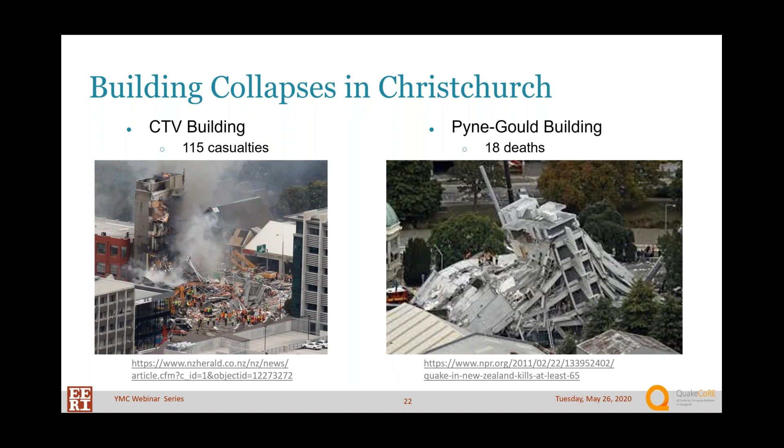Another thing that came out of this earthquake is that there were some widespread access restrictions due to safety cordons around buildings that were pretty heavily damaged. I was really glad to be able to be there in person and get to know a little bit more about how this all works, because this is actually what inspired my PhD research. And so to actually be there in person just changed how I viewed all of that. So it was really great.

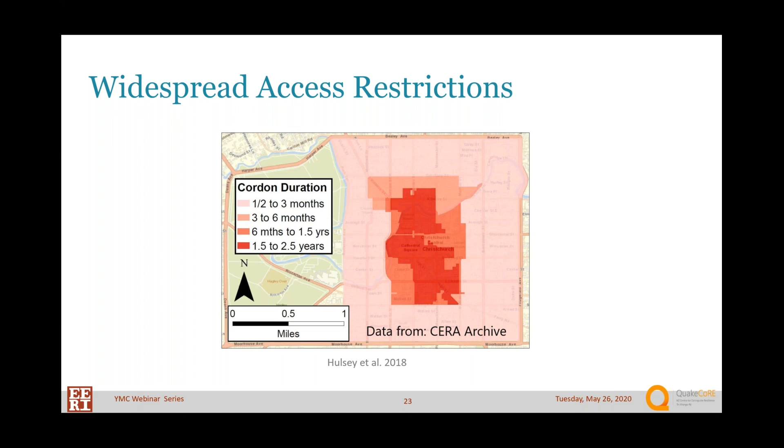So that was one of the earthquakes that we were there to observe how the recovery went. But the other one, as Caroline mentioned, was the Kaikoura earthquake in 2016. This is a figure from Thornton Tomasetti. You can't see all the little writing there, so what I'm going to do is show a few of those annotations a little bit larger and show how our trip that Caroline just outlined actually perfectly aligned with these. So it was very intentional that we hit all of these.

So one is that there was a lot of building damage in Kaikoura. We got to actually stop there. That was the scene that the beach picture was from, Kaikoura. But on the way there, we got to go to the leader farm and see all of those ground displacements and the landslide that Caroline showed a picture of.

And I think this was really, really moving for a lot of us because we got to meet the wife of the husband and wife team who run the Leader farm, and just the way in which she spoke about their experience. The landslide actually covered their power plant and their water supply, and just the way in which she discussed how they bounced back from that. I think that was probably the biggest thing that I took away from what resilience means.

And many of us were joking about how we would want to come back and be an intern at their farm. I'm not sure that it was all entirely joking for everyone. That was really, really fun.

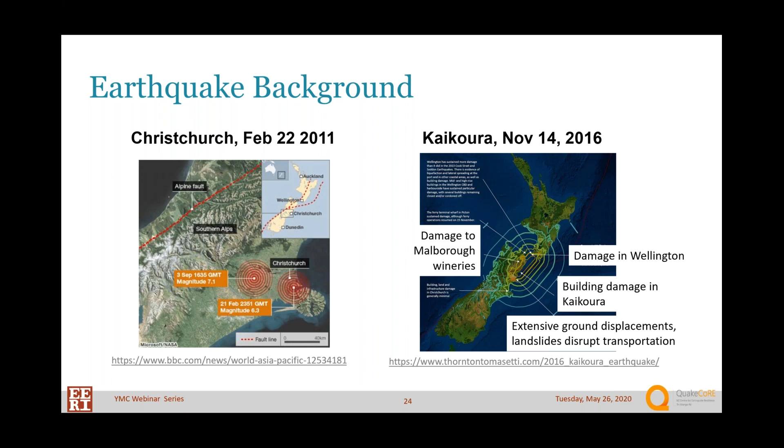So one of the big things that came out of that earthquake was lifeline damage in and out of Kaikoura. So all of the highways going down the north eastern edge of the South Island were completely closed off. You can see that in the right figure here. And so Kaikoura actually was inaccessible by road for up to 6 months. And then I think the southern direction got opened first, and then another 6 months later, the northern direction was opened.

So it really, really affected that town, but also all of New Zealand's transportation system, and making sure we could get goods and things across. So it was really, really impactful.

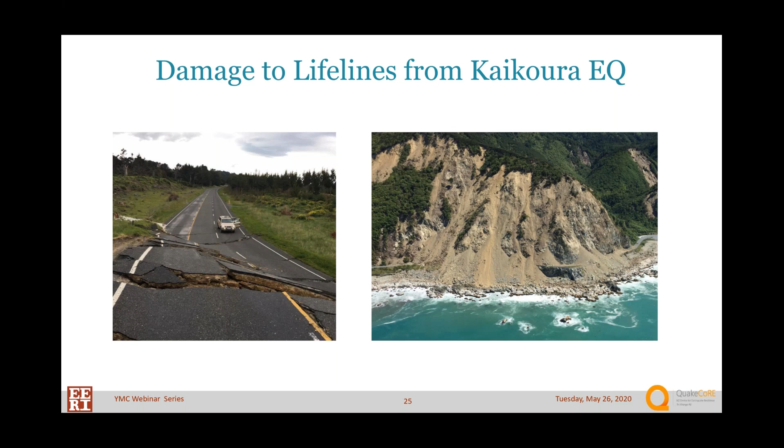And so as I talk now about the recovery, I want to frame it based on something that was discussed in the National Civil Defence Emergency Management Strategy, which is where they're talking about what it means to have recovery. And the 3 R's that they talked about in this space were risk reduction, readiness, and response. So our conversation currently about the built environment is going to focus mostly on risk reduction, but also the way in which you structure the built environment can contribute to readiness, which is making sure that in the event of an earthquake, you are ready and prepared to act as necessary.

And then the response would be making sure that you're able to really enact and move forward with all of those efforts. But we're going to focus primarily on risk reduction. And the 2 opportunities that we observed in this were, 1, to rebuild with enhanced structures, and 2nd, to reconfigure the built environment. So with regards to rebuilding with enhanced structures, one of the things that came out of this is that there were updated hazard maps.

As Caroline mentioned, it wasn't even known that there was that fault that showed up on the Leader farm. So there's a lot more information that came out both after the Canterbury earthquake sequence and then even during Kaikoura about what the hazard really was. And so one of the things was that the earthquake hazard maps were distinctly changed from before and after the Canterbury earthquake sequence. That's the one that was going on around Christchurch back in 2011.

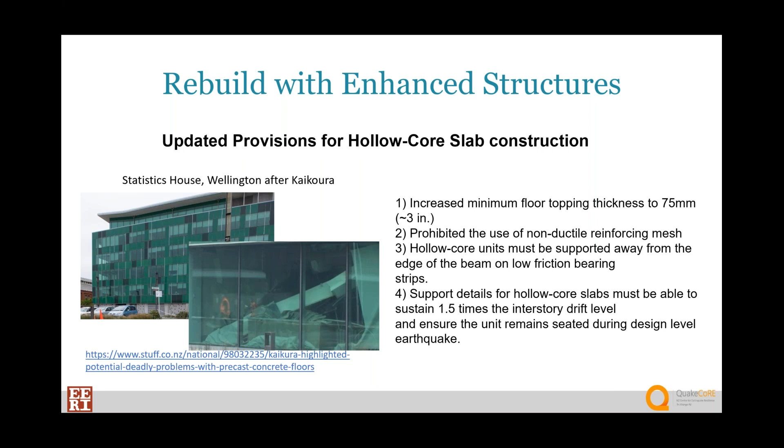Another thing is to start implementing low damage technologies. So this is a picture of the Rehua building on the University of Canterbury campus. This, instead of being torn down, was retrofit, and the way in which they did that was to use viscous dampers and buckling restrained braces. So here you can see one of the viscous dampers, and then here you can see a buckling restrained brace.

And it's been interesting to see how in the aftermath of the earthquake, New Zealand was really ready to start embracing these new technologies. There's been speculation that in the States, if this were to happen, it would be a little bit more difficult to embrace innovation quite as easily, just because of the way that our codes work and things like that. But it was cool to hear how this was addressed in New Zealand.

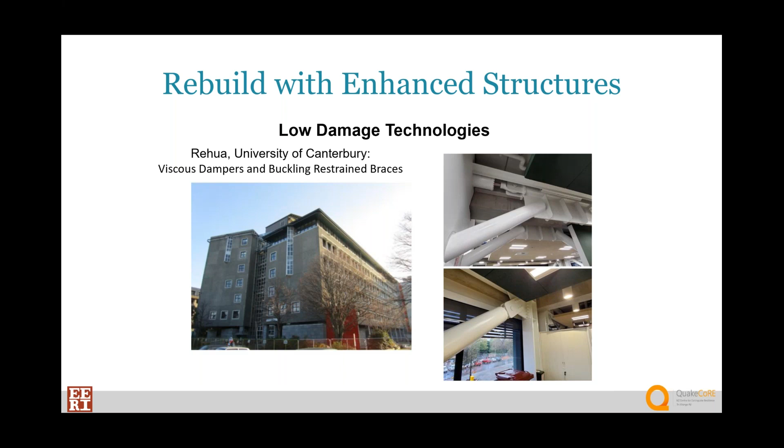Another thing is that a lot of people started using base isolation. So here on the waterfront in Wellington is an example of that. I put in these red lines here so you could see what we're talking about, but this is basically right around here on the left picture, down on the ground. And it's an isolation gap that you really wouldn't see if you didn't know to be looking for it. But in the event of an earthquake, it allows the building to slide with respect to the rest of the ground, and these pavers would actually pop up and move so that the building could move with respect to the other part of the ground.

On a personal note, this walkway was an interesting one for me to remember, because this is where I first started talking to Ken Elwood, who was there from University of Auckland, to give us this tour. And that conversation has since led to, I will be doing a postdoc with him after I finish. And so that's just a plug to say these are really, really important. These EERI events, including travel study programs, are really important ways for us as younger members to really get involved. Even if you can't go on a travel study tour, it's great to go in person to the annual meetings. I went in 2015, the first one that I ever attended.

I didn't know a single person. I didn't go with anyone from my university, but the way in which I was welcomed, even though I didn't have anything to offer, I didn't have a poster, it was really quite incredible. I still talk with some of the people who I met there. They're well known in our field. I also joined the public policy committee at that time. It was an open committee, and because I've continued to stay with them, I was invited to be part of the planning committee for the policy track at last year's annual meeting in March. So given that this is a younger members committee discussion, I wanted to put in that plug and say it really is a great way to engage with our organization, and EERI and members of EERI are wonderful at bringing in and welcoming younger members. Back to the presentation.

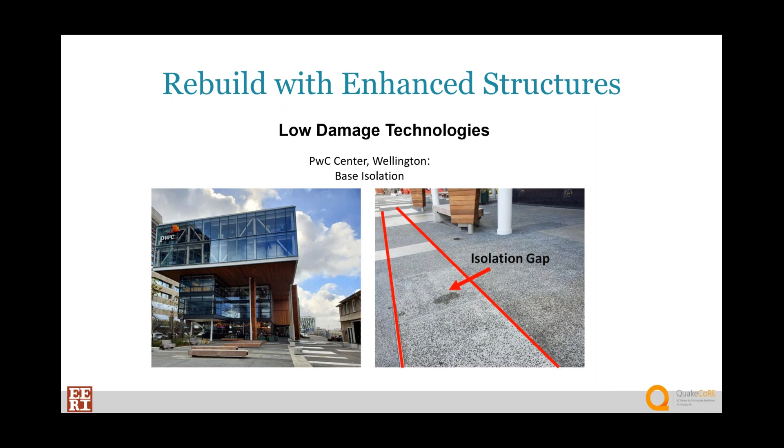Another thing, in addition to all the buildings, there's an opportunity to rebuild with enhanced infrastructure. So I mentioned all of the lifelines, those roads are what I showed you, but also there were issues with power and cell service and things like that. And so that was a big effort for how they would address and rebuild those roads. But one thing that they recognized was that you can't necessarily prevent any damage in subsequent earthquakes. And so they wanted to incorporate a design that would allow for quick recovery of road networks if, in fact, there was damage to them. So try to make them less damageable, but also in the event of damage, how can we get them back on board more quickly?

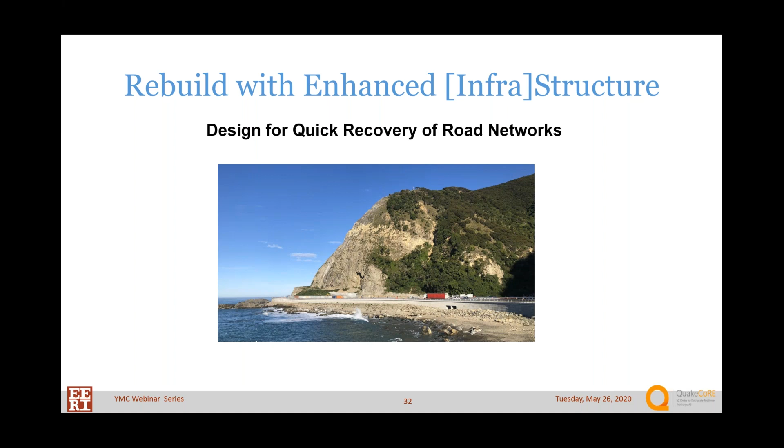So we've talked now about the opportunity to rebuild with enhanced structures, ones that won't be damaged as easily, but there's also, in the aftermath of the earthquakes, when there really was a significant amount of destruction, and so then as you're rebuilding, you have to figure out what is it that we're going to rebuild. And so there's this opportunity to also reconfigure the built environment. And so we thought a lot about what opportunities are there in that space in order to reduce risk.

But really the benefit of this is that all of these groups are already working now before an earthquake that will come in the future. And so they know how to work with each other. They know what each other's needs are. They know who to talk to and who's the best person to ask for various things. And so that's been really cool to see how by reconfiguring the built environment, bringing everyone into the same building, they're really enabling their readiness, which was another one of the R's of recovery, making sure that we are ready to respond to an earthquake.

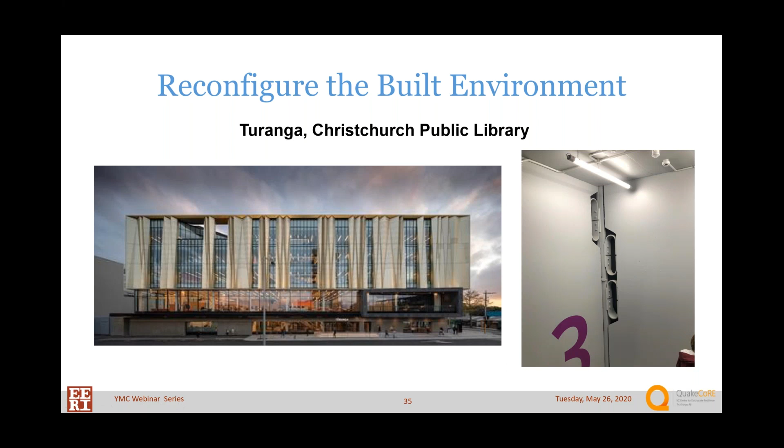But again, this needed to be done with enhanced structures. And so what they did here was that they have shear walls. On the right picture here, we see a shear wall on the left and on the right. And then they let these rock with respect to each other so that when you get a lot of movement in the earthquake, there aren't rigid connections that are going to break. Instead, there are these U-shaped fuses, which are going to accumulate all of the damage. And then because they're open and readily accessible, those can be replaced after an earthquake.

So again, what I've discussed is the opportunity to rebuild with enhanced structures and to reconfigure the built environment. And both of those are ways to handle the risk reduction portion of preparing for and anticipating recovery. But as I also said, it really gets us ready for the readiness aspect that will be coming, making sure that we're thinking about and addressing and working together so that all of those aspects of recovery can move forward the next time this comes around.

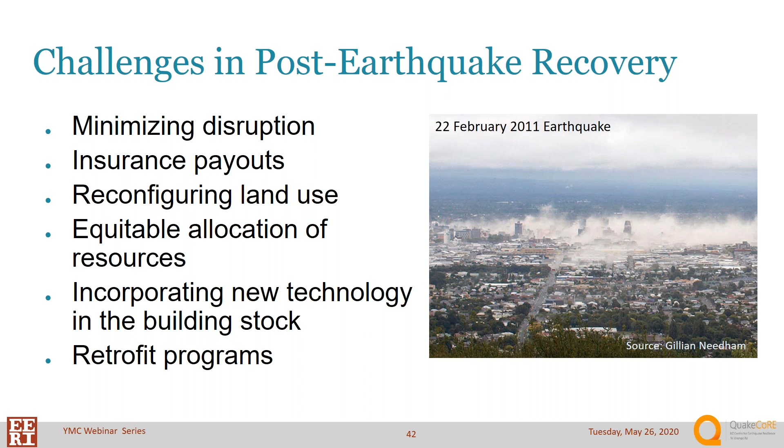So the first thing I want to come back to is the red zone land that Anne talked about. These were areas mostly around the Avon River that were subject to liquefaction or lateral spreading. And this was quite a problem in Christchurch. There were about 8,000 residences that were in the red zone.

So as you recover as a community, you've lost 8,000 units of housing in a city of only about 400,000 people. That's actually quite significant. And this is land that it's essentially been deemed uneconomical to build on again. So that's a permanent loss of space that you would be able to build more housing on.

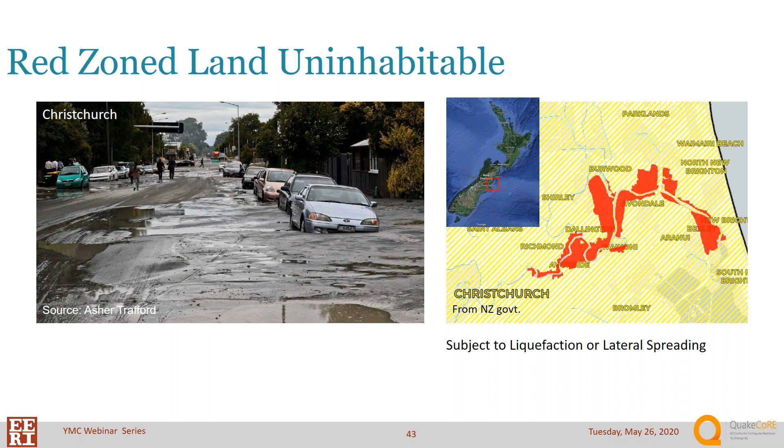Another area related to being able to use space again and minimize disruption is related to cordons. Now, cordons have a lot of benefits, and Anne touched on this as well, that you weren't able to access parts of the city center for quite a long time after the February 2011 earthquake. So there are certainly short-term benefits of cordons.

There's easier unimpeded access for first and second responders, and then some long-term benefits as well, that you can commence repairs without simultaneously trying to keep a large space functional and open to the public. It makes things a little bit easier from the construction perspective. And then also, when you close off this large space because you're repairing, then you can look at the space holistically and decide exactly how you want to repair the space in tandem, despite some push and pull from various stakeholders within the cordon.

But cordons are extremely disruptive. So there were about 50,000 central city jobs that were displaced because of the cordons. And 32% of the businesses had staff that were temporarily forced to relocate. So not only are those businesses relocating, other people in their homes are also potentially relocating. And many of them were permanently relocated. And of those people who were relocated, about 80% of them worked in the CBD.

So in combination of seeing the red zones and seeing the cordons and other damage around Christchurch, we're seeing a very large percentage of the economic engine for the region being displaced. And the cordons are also a challenge because once you've cordoned off the area, even if you have a building that's functioning, you can't access it yet. So ultimately, about 70% of the buildings in this cordon region were demolished. And it took about 2.5 years, until I think June of 2013, for the cordons to be opened up again and removed.

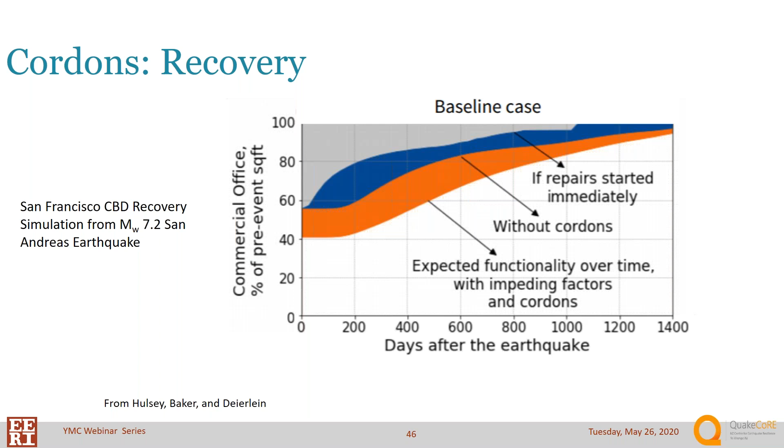And what they found is that if you do include things like cordons that affect not only the damaged buildings, but the undamaged buildings that are in heavily damaged areas of the city, the recovery looks quite different. It happens much slower, and you lose a much larger portion of your office space, and thus your economic engine. And it just takes quite a long time to recover. So it's quite important that we consider things like cordons when we look at the resilience of a city.

So another challenge is how you deal with insurance. For a little bit of background on homeowners insurance in New Zealand, nearly all homes have earthquake insurance, which is great from the perspective of homeowners who have some financial backing if there's damage from an earthquake. And this is quite in contrast to California, where we're probably less than 10% of homes with earthquake insurance. But the way the earthquake insurance is set up has potentially caused some issues after the earthquake.

So there is a government program through EQC that funds up to about $100,000 of damage from the earthquake, and then supplemental private insurance picks up any damage beyond that threshold in an event. Now, there were so many earthquakes in quick succession, September 2010, February 2011, June 2011, and December 2011, and a couple other ones as well, that there wasn't time to actually inspect all of the homes in between every single event, particularly between the first earthquake in September 2010 and the second in February 2011.

So then, if you're looking at a home after it's been damaged by an earthquake, but you don't know what the state was before when it was potentially damaged by another earthquake, then you don't know who should be paying out. And as a result, there have been disputes between the insurers on how you apportion damage between the events.

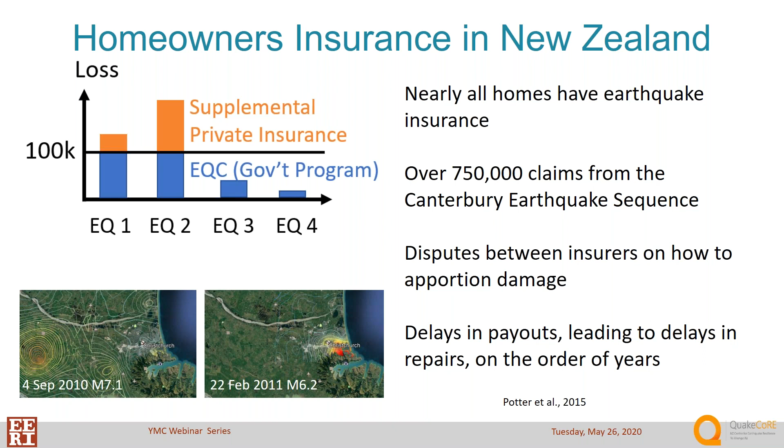And this can unfortunately lead to delays in payouts and delays in repairs as well, which slows the recovery of the region. And housing is obviously quite important. You're not going to have people return to the city center unless they have somewhere to live in the area.

So another important factor is how you're rebuilding and how you're reconfiguring space. And Christchurch has really done a nice job of becoming denser and removing some of the structures that were quite vulnerable in areas of liquefaction and areas near the river.

But there are some issues, and I want to highlight one of those issues by a photo that is, I'll call it today. It wasn't taken today, obviously, and I want to note that this is pre-pandemic, which I note because it's quite empty. So in this photo, we see from the CBD, almost no one is on the street. It's around lunchtime, very wide roads, beautiful bike lanes, and no one's using them. No one's walking around, and that's an issue. You know, we want space to be used effectively.

And part of the problem has been that Christchurch has taken an approach of sectoral redevelopment. They essentially have this top-down approach where, based on the way that the land is being used, they're zoning it that way. And the problem with this is that you then don't have mixed use. And the result is that there's very little or no residential construction in Christchurch CBD. And this results in ineffective use of the space.

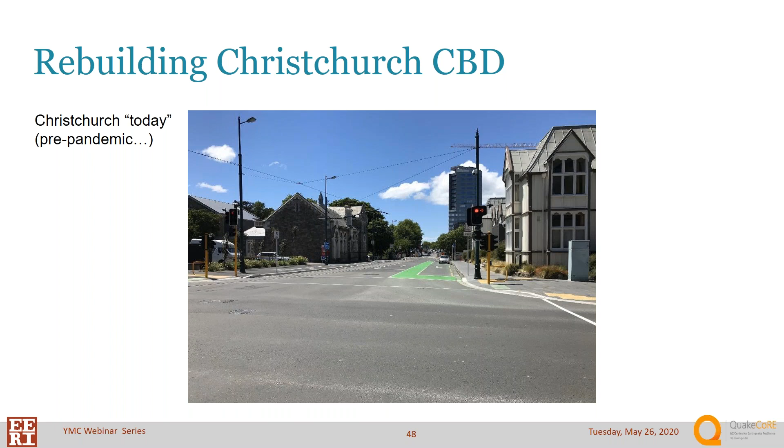And perhaps I'm particularly offended as someone who lives in Manhattan that there isn't mixed use. There aren't residences and businesses and other commercial space and retail and restaurants all right next to each other. We're missing that big component of housing. But I think that it's really hindering the recovery of cities when you have one but not the other, not effectively using that space.

The issue is that that church was really a staple of Christchurch. The community felt quite a connection to the church, and public funds had gone to maintaining the church over the years. This would be a private entity making a decision on, well, perhaps a quasi-public asset. At least the public is involved in it, and certainly has a stake in the church remaining there. And so this led to legal disputes. And it's finally been resolved in the last few months. The church will be rebuilt in a public-private partnership.

And so this is something I want to contrast with Wellington Town Hall, which has been closed since the 2013 Seddon earthquake in Wellington. And this is a performance space. It's well known in Wellington. The Beatles performed there, so it must be kind of famous. And this has been closed for seismic upgrades, and the plan currently is to install screw piles and seismic isolation. But I want to add that is quite expensive. I think the estimates now are over $100 million as the minimum that it will take to repair Wellington Town Hall. But is that the best use of funds?

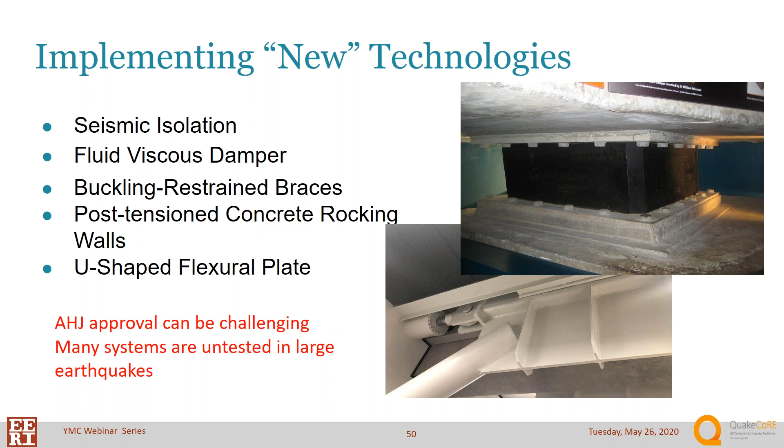There's been testing in the lab, perhaps. Maybe it's gone through one or two events, but until we get the earthquake that happens to target that type of system, we don't really know how it'll behave. So this perhaps is my chance to advocate for more funding for experimental work in earthquake engineering.

Now, you use a base isolated building when you want to minimize or limit damage to the structure, and really you want the structure to be inhabitable and a usable space immediately after the event. Now, if the tsunami comes, and in theory it takes out the first story, so the water just goes underneath the building and doesn't really damage the isolated structure, is that space still usable? Well, there certainly is going to be widespread destruction if the tsunami has come to the site. And I would question if some of the lifelines and utilities will still be useful, and if some of the services will still work in the area. And so are we really getting what we're paying for with base isolation?

So a last point I want to touch on is related to retrofit programs. And New Zealand has taken an interesting approach, and it's largely because retrofitting a building is quite expensive. So bringing it up to a code standard costs more than constructing a building from scratch, sometimes 30 or 40% more. So it often doesn't make financial sense to bring it up to the new building standard. You probably would just demolish it.

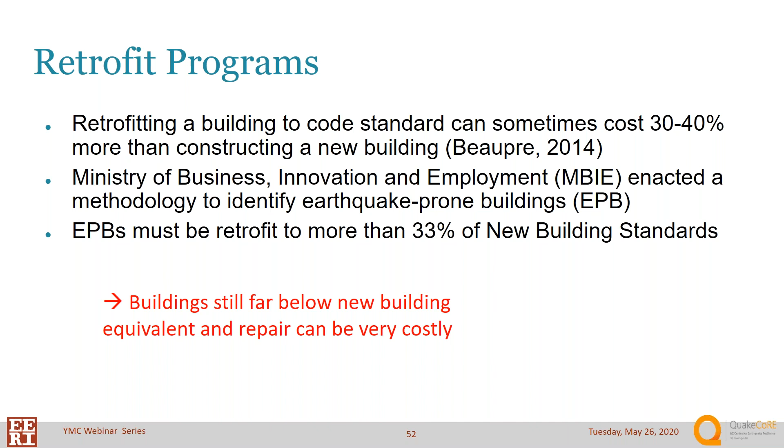So I've presented a lot of challenges and have offered limited to no solutions on how we address these challenges, but I'll give my 2 cents now on how we can address some of these challenges after earthquakes. So one, prioritizing the review and retrofit of buildings that, if damaged, will impact the use of surrounding buildings. Cordons are very important. You can shut down a very large city center by seeing damage to only a couple of structures, and this really can destroy the economic engine of those regions. I think we need to encourage mixed-use redevelopment. Let's make sure we're adequately using these spaces, that we have residential units, that we have office space, that we have restaurants, that we have commercial space. The mixed use will really contribute to the vibrancy and resilience of that community.

And let's make sure that all stakeholders are represented. We need to make sure all the diverse stakeholders, and I'm talking mostly about economic diversity as well as, in New Zealand in particular, diversity including the Maori, make sure they're all represented when we make decisions about recovery. We need more research into low damage systems so that we can implement them and we can improve the quality of the building stock. And finally, we need further study for how and for how long buildings should be used, and that should really inform the retrofit programs that we have for where it makes sense to retrofit and where it might make sense to have a new building. So I hope that has not been too critical of New Zealand, really trying to offer suggestions of how we can meet challenges in future earthquakes and recover successfully.

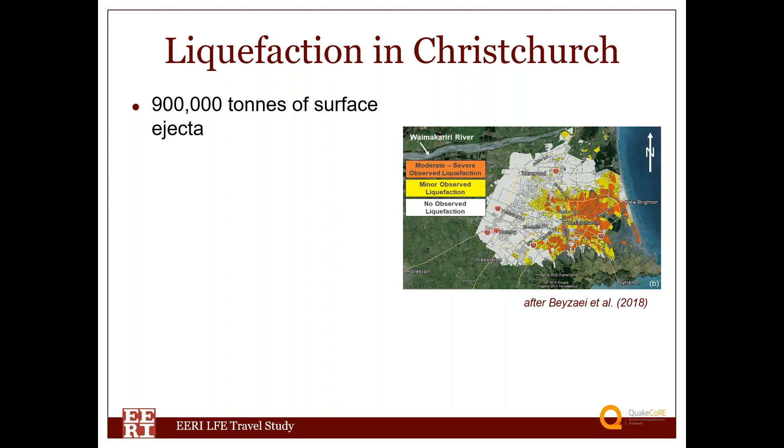That amount of earthwork has a significant carbon footprint, as you might expect. You're operating heavy machinery, you need to transport a lot of material to potentially very distant areas. And so this process, along with the rest of the demolition work that occurred throughout Christchurch on buildings, contributed to significant short-term degradation in air quality throughout the greater Christchurch area. That is an environmental impact that also impacts the human population as well.

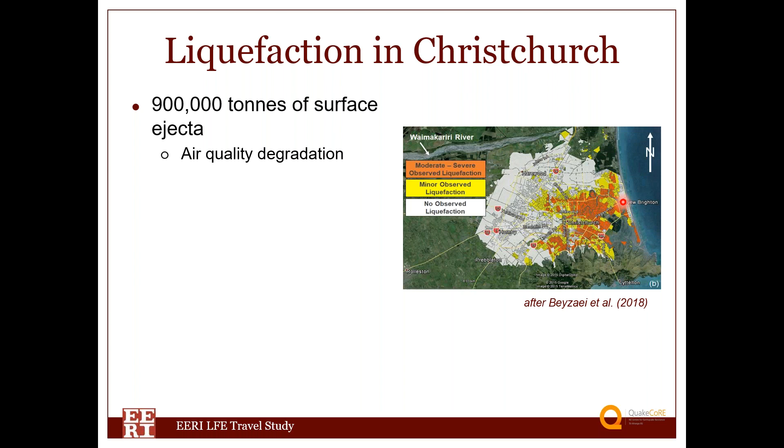To focus more on the areas most severely affected by liquefaction near the Avon River, this is an issue that both Anne and Ezra brought up earlier. This is an area where numerous homes needed to be demolished, and this is what the land looks like today. It's still an extreme liquefaction hazard zone. There are not, and I don't believe there will be, plans to rebuild homes here, but it's a pretty nice looking area. And there has been a lot of discussion about turning this region into a green belt, public park space, and that goes back to this idea of amenity value.

Can you increase this amenity value in an area where you can't really build out human infrastructure otherwise? We are still a decade in, and its fate hasn't fully been decided by local government, but this is one of those examples of ways to salvage amenity value out of a very high hazard area.

The liquefaction and lateral spreading also heavily impacted waterways, the third big component of liquefaction in Christchurch. Water quality was adversely affected by increases in suspended silts and sediment, as well as, I think more critically, ruptures to very large sewage lines. And so for humans, sewage line ruptures are extremely inconvenient. I mean, especially in this area, a 2-month boil notice is not a fun way to go through life.

That being said, the impacts of widespread sewage ruptures on aquatic ecosystems, both wildlife and flora, were significantly more severe and more long-term. And this is an example of evaluating these hazards in terms of how they impact our biodiversity and ecosystems.

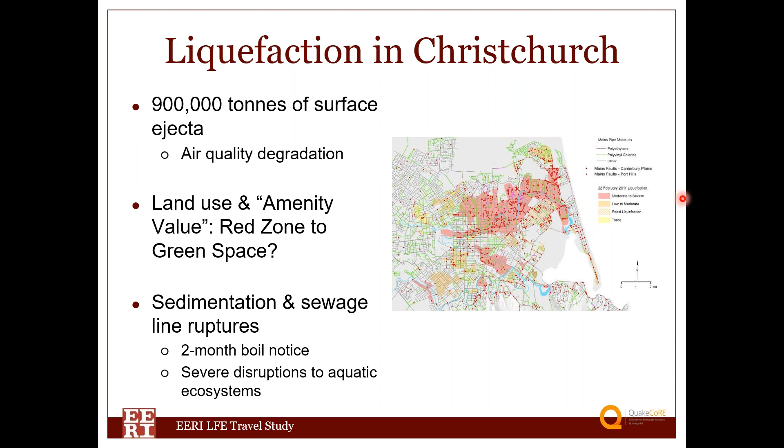Moving past liquefaction, there were numerous instances of land damage in the 2016 Kaikoura earthquake. Zooming in on a couple areas, we wanted to highlight, as Anne did earlier, the impacts of widespread landslides, as well as surface fault ruptures on a sheep farm in Kaikoura. As Anne said earlier, one of the more spectacular features was the Leader landslide, which buried and destroyed the farm's pumping system that supplied water to all of their farm animals.

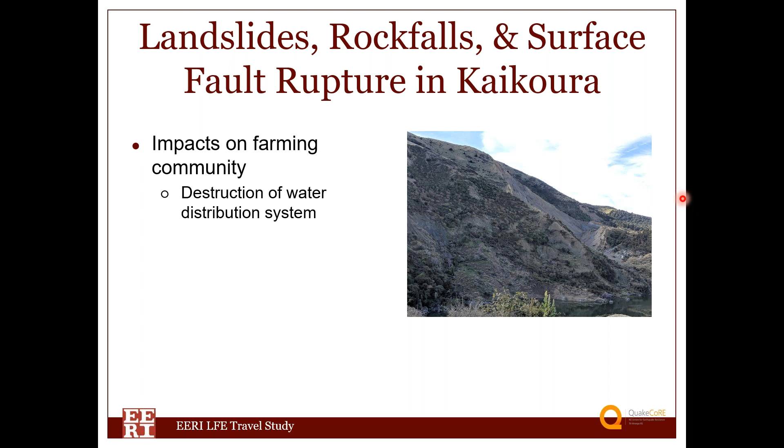One of the interesting features of this resilience case study was that the distribution system was eventually replaced by a more reliable and more efficient gravity system. And this is a really neat example of taking the opportunity to build a more improved resilient system when given the opportunity. This did, however, take 3 months to be fully operational, and that really put a strain on the farm's ability to get back up and running. But still, a really interesting example of what is known as building back better, which was the buzzword that we threw around a lot that week.

Another case study was the large landslide north of Kaikoura at Ohau Point. In addition to the damage to the roadway that you can see, the roadway was completely buried, and in addition to that impact on human infrastructure, the inability to access that road for months on end, the landslide also buried a known seal nesting ground right after breeding season. I was actually going to move forward with a picture of seal pups, but I thought that was just a little bit too difficult to put people through emotionally. But this was right after breeding season, and an estimated 1,500 seal pups were thought to have been at risk, although we don't know exactly what the final casualty count was.

And so this presented another opportunity for rebuilding the roadway to accommodate the needs of both the local human population and wildlife. And so what you're seeing with that little culvert there, that was built specifically to allow the seals to continue to access the sea from what was then their buried breeding ground. And so it's one of those things where everybody wins a little bit.

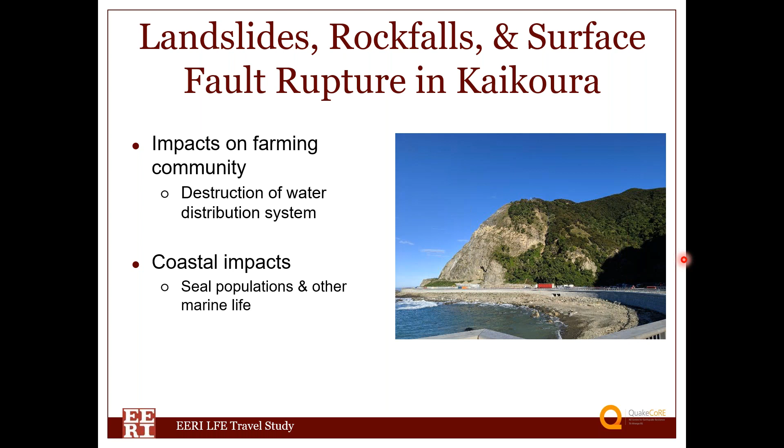Okay, so those were just a few examples of how seismic hazards that engineers and officials really spend a lot of time worrying about can impact the natural environment in ways that we may not typically consider during that planning and design stage. We might worry about things like short-term service interruptions or road access for human populations, but I think it's really important to be able to dig a little deeper and understand how these types of vulnerabilities in our critical infrastructure and in the built environment can eventually transfer that risk to the natural environment.

So with that in mind, we can take some of the lessons learned that I outlined in the previous slides and use them sort of to broadly inform policy moving forward. The first recommendation that our study group really focused on was understanding our hazards and consequences to those hazards. And, as importantly, understanding the uncertainties, kind of the upper and lower bounds of those hazards and consequences.

And this one might feel pretty obvious, relatively basic, but it's really important to note that both Canterbury and Kaikoura featured ruptures of unknown faults that were near populated areas. This is a challenge. This will always be a challenge in hazard characterization. It's the idea that hazard perception is constantly evolving. We need to be able to continue to invest time and money into investigating and characterizing our hazard space.

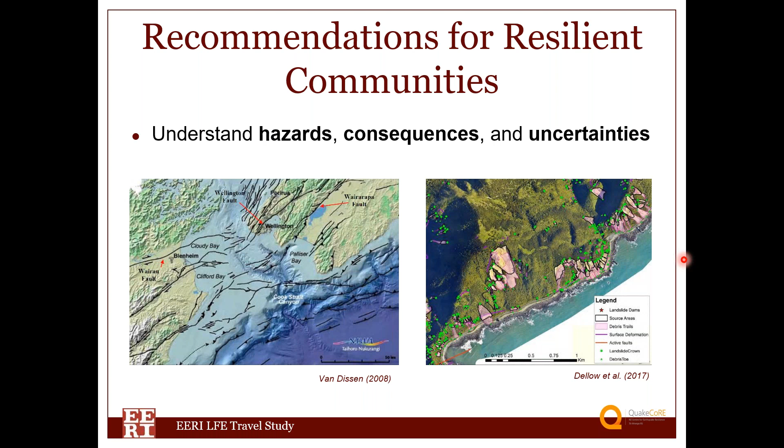We also need to be able to consider vulnerabilities from sort of an ensemble of potential hazards, not just earthquakes. And we also need to be able to consider how the combination of two or more hazards might increase the severity of a particular consequence. So going back to our landslide example, the Dellow et al. study that I referenced in the previous slide recognized that even though earthquakes were the primary cause for landslide occurrence in Kaikoura, there is an additional ongoing risk to long-term stability due to the possibility of large rainstorm events.

And this is the type of mechanism that a single hazard approach just doesn't sufficiently capture, potentially in areas that are prone to multiple types of natural hazards. And I would argue that almost every area in the world is prone to multiple types of natural hazards.

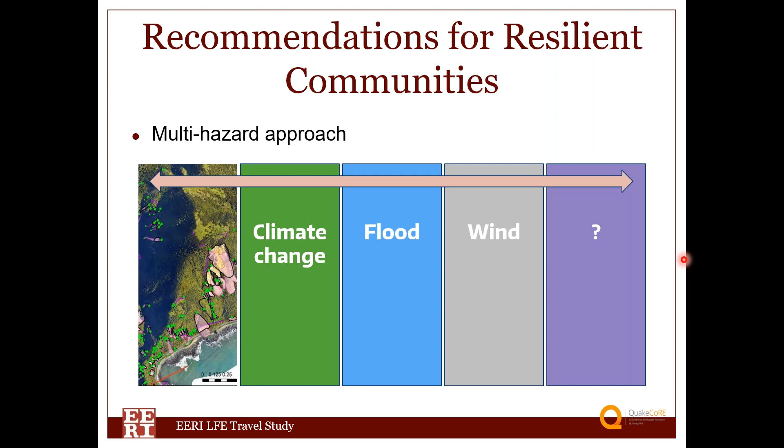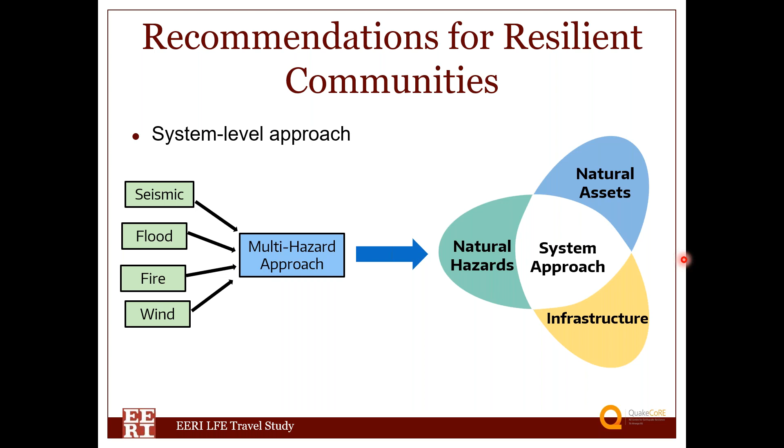If we can take one more step back from this multi-hazard perspective and consider how hazards can lead to impacts on the land and its assets, we arrive at a system level approach where we need to be able to consider community impacts as a whole, understanding the interdependencies between the natural and built environments, and consider how multiple hazards might affect those aspects of the community. So that was sort of the general framework of the approach.

One of the specific applications I want to highlight could be the protection of local fauna. These types of measures would involve coordinating with environmental agencies to identify areas where vulnerabilities in our built environment might impact local fauna. This is bringing in more stakeholders, more broad areas of expertise to approach this problem that we really might typically just start and end with evaluating the infrastructure vulnerability without looking at the environmental sort of cascading impact.

Another would be recognizing that wildlife sanctuaries and reserves are an extremely critical part of not just amenity value, but the natural environment itself. So evaluating infrastructure in sanctuaries and reserves, employing pre-disaster strategies by working with those managing these types of sanctuaries, communicating the risks to them. These are all really important steps that we can take. And it consists of really just reaching out, picking up the phone or emailing people and just establishing the contact and starting the conversation.

You can also approach this from the natural resource side of things, specifically water resources. Obviously, we want to be able to identify those critical lifelines and assess their vulnerabilities. Again, not just to human populations, but to the natural environment, and understand their direct impacts. Again, not just the damage and repair costs, but what is the long-term impact to biodiversity in a particular aquatic environment. Obviously, we need to be able to prepare contingencies for service gaps to local residents. That's keeping the human population involved.